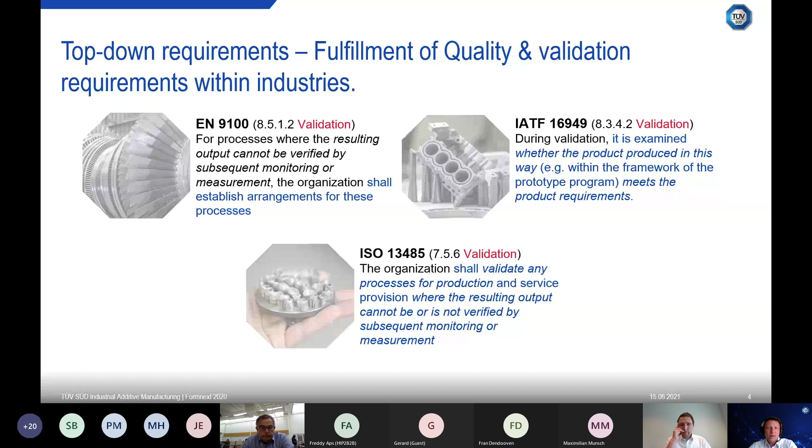The way we validate AM is on its way to being standardized. If you look at the major pain points of the technology, this leads us to the point of what needs to be standardized, and where we can really benefit to accelerate processes and minimize risks. Just to give you a few examples.

Taking the good old Ishikawa approach, which gives us this overview. So, machine: in AM it's been available for about 30 years, slightly more, and it's still considered a very innovative process in production, because the first 20 years were used for prototyping, just appearing in production usage. That means we need to assure that proof of reproducibility and proof of safety is there. So every standard which helps give proof to AM machinery, which we can test, inspect, and certify according to, accelerates the adoption of AM. It's as easy as that. The first standards, which I will explain later, are coming up here.

As well, materials—especially for powder bed fusion, where powders are handled—are highly susceptible to contamination. If you take a material into a process chamber with existing machinery, there's such a high chance of contamination by the worker or by the processes performed at the machine. This is incredibly risky, especially compared with existing milling machines, etc. So this needs to be standardized. How do we standardize material maintenance at the shop floor? It's very difficult, because the human factor is so strongly involved. So what we did was standardize the operational performance of a production site.

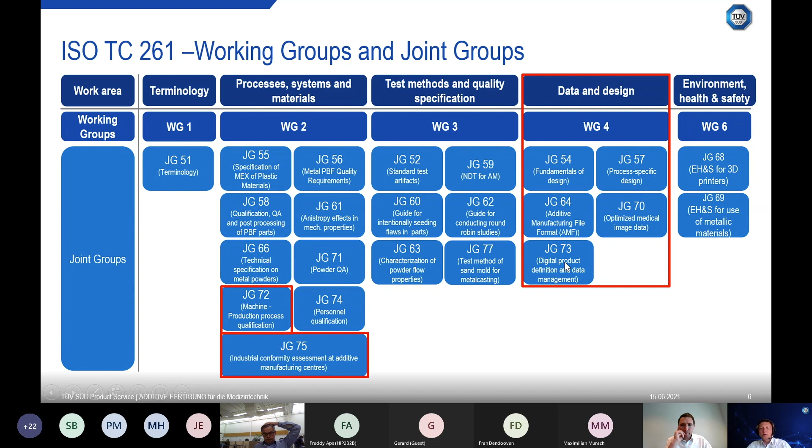In general, I believe in standardized implementation. As soon as we have standards, there is a TIC institution which can test according to that, and this accelerates things because of the clearly defined implementation requirements. The consultative approach is still very valid and very good, but if standards are strong and very credible, it becomes more sensible to just use the existing standards.

If there is no standard, of course, the consultative approach is the ideal way. The good old trial and error approach is as well valid and not wrong, but of course is the most cost sensitive one. So trial and error, and learning from old mistakes, needs to be done by each technology which does not have any reference. But for those like powder bed fusion, where we have thousands of installed systems already, the trial and error approach does not need to be made anymore.

Now have a look at our concept, how we defined standardized implementation. If we first of all look at the application-specific requirements, it's difficult to really take all applications and say, if you get TÜV Süd certified or certified according to industrial AM production site, you will be able to work reproducibly for all applications.

Of course, this is not possible. But what is possible is that we use the typical AM pain points and pitfalls and standardize those that de facto humans are working to avoid. And this is what we did. So in the standard ISO ASTM 52920, we collected together all the well-known quality assurance measures in the production side, just to avoid that trial and error is happening.

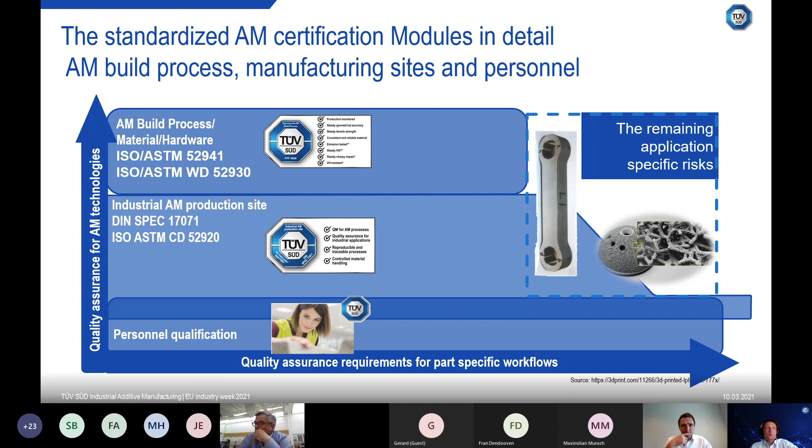We are training the quality managers how to set up a quality assured system, which fits perfectly and is aligned perfectly with general quality management systems like 9001. And we developed a scheme for the machinery to combine the materials and processes on the hardware, to test them according to reproducible output.

Here's a small overview about AM-specific risks from the machinery point of view. This is something that needs to be done for highly critical components. So if you have a highly critical component which is implanted in a human and has the chance to cause deaths, or is flying around and has a chance to cause damage and deaths, then we need to use a risk assessment, and this risk assessment in AM is as well on the way to be standardized.

This is the next step that I initiated at the ISO ASTM side, that we do a standardized risk mapping for highly critical components. This will help to accelerate as well the adoption within this sector, as risks are well known already for technologies like powder bed fusion. So we can standardize it.

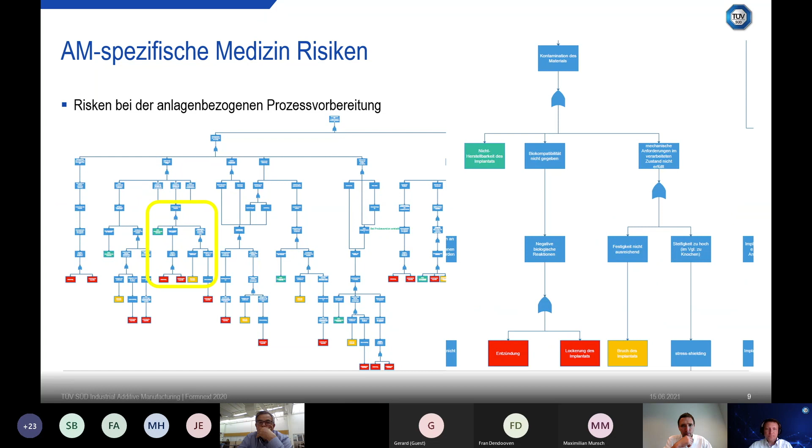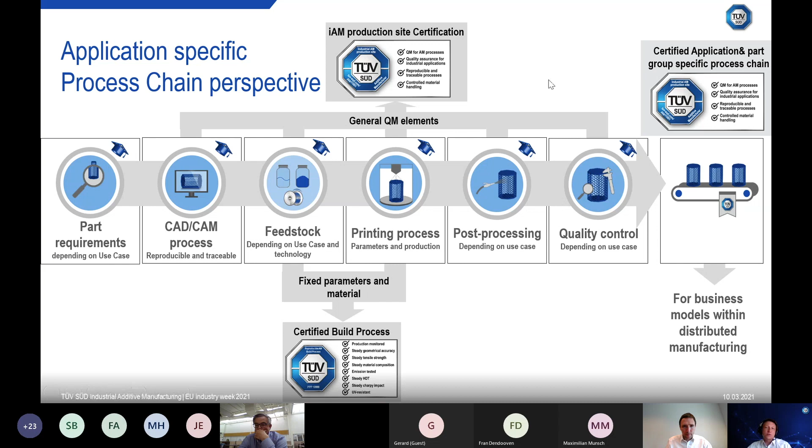Industry standards in AM in general help to decide how to minimize the efforts on validation, how to fulfill regulated industry requirements, because you can use those standards to fulfill those, and you can install them in purchase agreements. So, for example, establishing a purchasing system for AM spare parts internationally, you could, in such a purchase agreement, install standards which help you to monitor the quality.

And this is something that we can train, of course, besides the fundamentals of AM, design validation topics, materials know-how, which is very specific for material science researchers, and of course risk assessment, which I already mentioned, to give you guidance how to perform a risk mapping in AM.

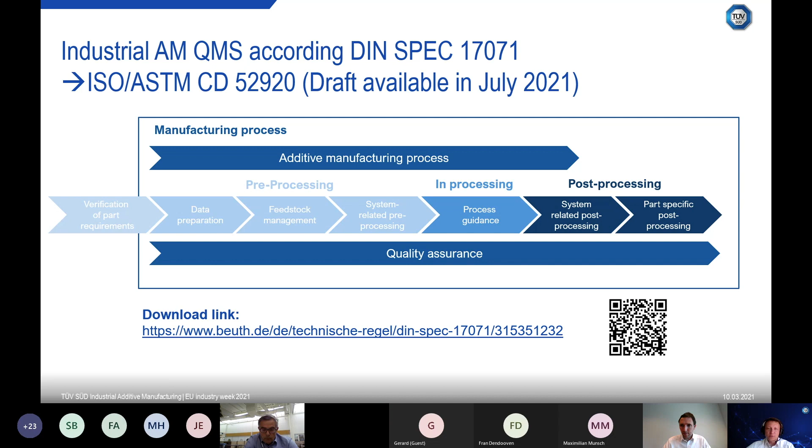And I started to write this standard already at EOS 8 years ago, and right now we are there to make it really an international standard. So very proud of that, and it was a long journey. A lot of international experts contributed to this standard from aerospace and medical industry, and we took all interests of these industries into it.

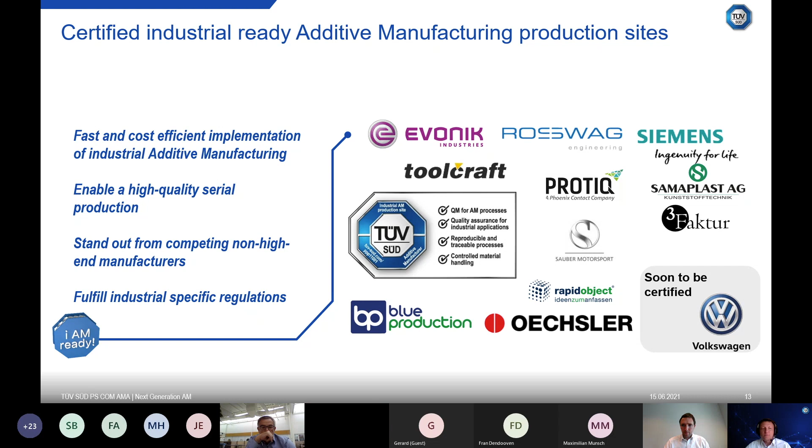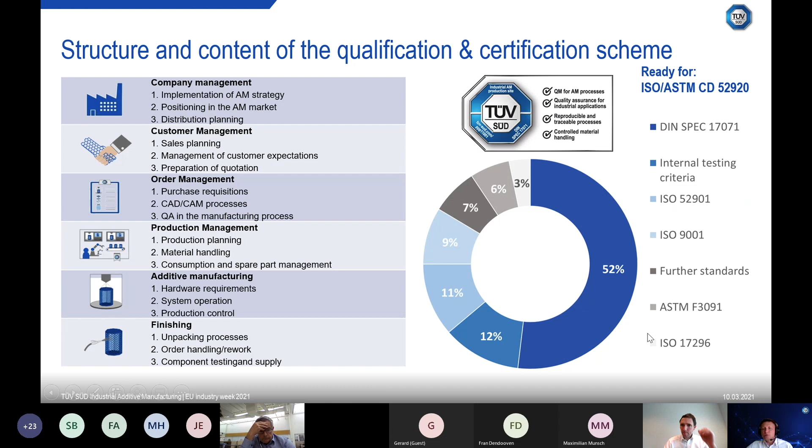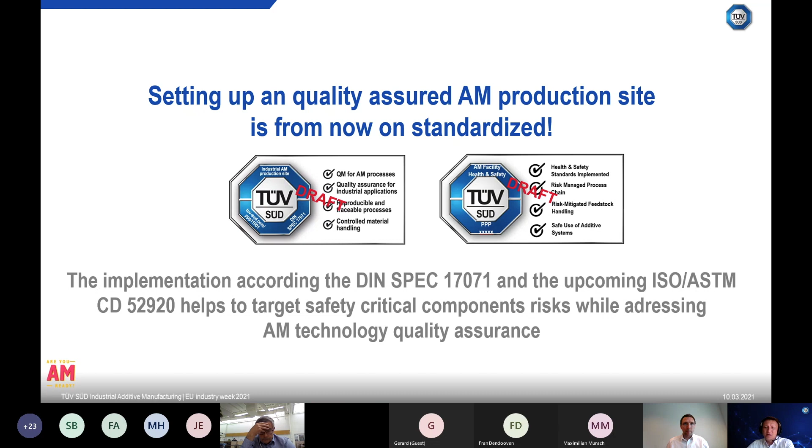An overview of the details of the certification program: the structure on the left side, the entire standards which are used in detail on the right side in the certification scheme. And this can as well be combined with health and safety audits and certifications, especially if you deal with hazardous materials.

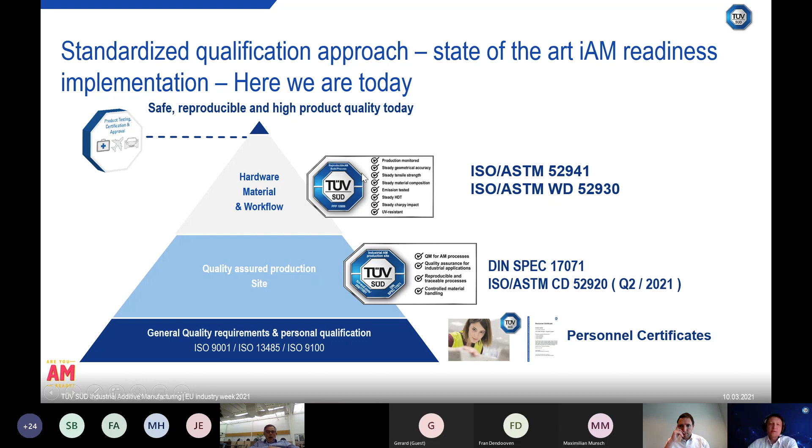It's just an overview of how it builds on top. So on the bottom line, we have personnel certificates for the staff on the shop floor. Then we have a quality assured production site, which I just explained. And then there's a build process certification. This is a very young service, which we just recently published and did here the first system certification together with

Ultimaker, a well-known desktop printer, and Ultimaker published here this Pro series of desktop printers, which they go with into production, and they are quite often installed in assembly lines, helping to deliver spare parts on demand for assembly lines.

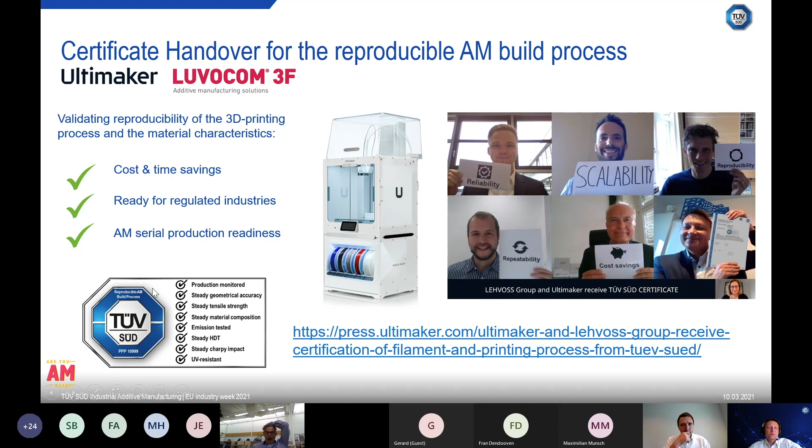Therefore, they decided to perform an installation and a reproducible AM build process certification with us, because it helps their customers to accelerate their adoption and to minimize the cost of installation, because IQ/OQ/PQ is partly already addressed within our reproducible AM build process certification.

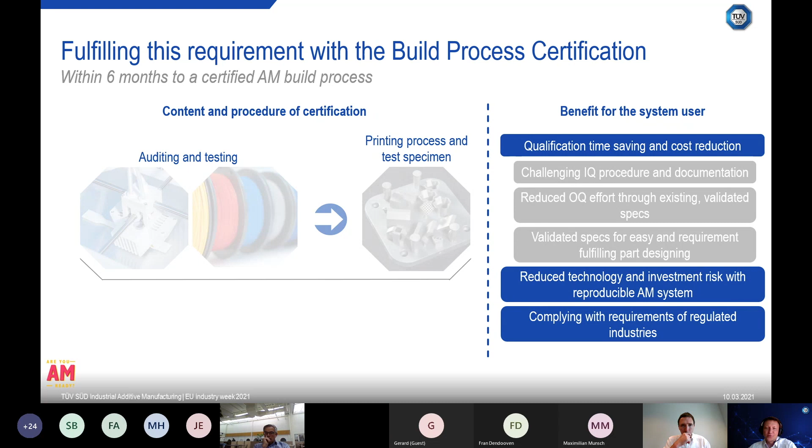For that, we are auditing and testing Ultimaker's manufacturing site, then the material manufacturing site, and of course printing parts at our facility at TÜV Süd. Ultimaker sent us 2 systems. We were printing the parts, testing those, and testing according to defined specs.

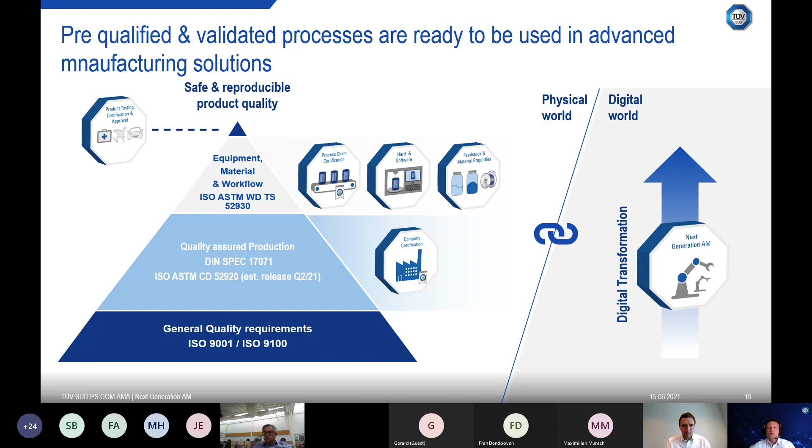All those are on the physical side, which I explained, like training, auditing on facilities, auditing on the build process. And I believe that this physical world, transparency and standardization help us to transform as well to the digital quality assurance world of AM processes.

There's a reason why. Of course, we want to utilize the full potential of AM, and this is a distributed supply chain network. So we all know that there's one major business driver in AM, which is distributed manufacturing, and this is enabled only if we can assure reproducible AM processes. So this works via TIC, testing, inspection, and certification, and standardization.

Then we need to install our printers globally, which are partly already installed. Certify them, test them, and establish a distributed supply chain network. As well, it fulfills, by the way, quite often sustainability demands of the future, as sustainability is as well taking care about CO2 emissions, about

sustainable development goals, SDGs, as well as the Lieferkettengesetz or other regulative requirements which are coming within the next few years. So companies need to find answers how to fulfill sustainability. And additive is one of these answers, so we can shortcut the global supply chain and use AM locally. As well, we can outsource production quite spontaneously if defined with quality assurance measures.

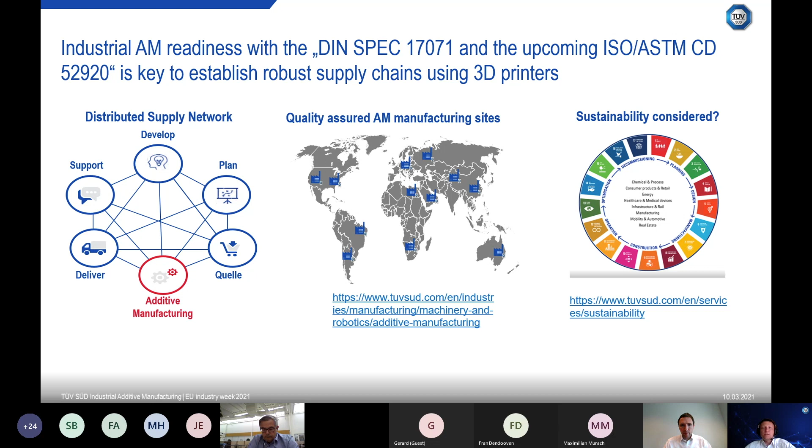As well, we can use material and reuse material within the printing process after recycling it. And we see all this happening in the industry. You met already a couple of startups which are really working on recycling of materials for AM machines, as well as distributed manufacturing platforms which are helping to organize that. As well, we see the regulative side. So it's a wonderful movement, and AM is for sure part of that.

What can a TIC player like TÜV Süd do? Of course, we can certify digitally somehow, if possible. I see this happening, but it's a journey for the next 10 years for sure, as the process is still highly man-made. So the human factor is making the decisions in the process, and to certify that just based on data is for now not possible.

So we can only certify parts of it, maybe as a next step the build process on the printer, if enough sensors are installed and we have the mechanism to analyze the data from the sensors. Here, by the way, we are working in several funded projects with the industry to try the first pilots out for such a scenario.

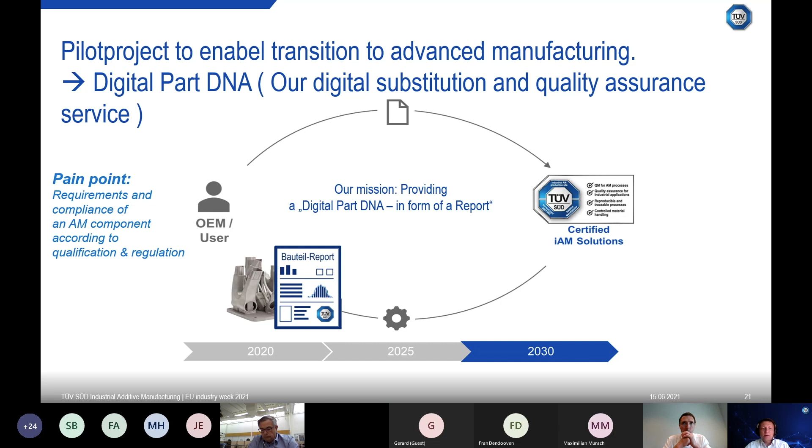So we are collecting data from the production side and installing sensors in the machines to understand how to validate or qualify an AM build process based on the sensor data. So the first setups are already made and the first data are collected, and here we are defining the first kind of quality gates.

But I see as well that the part itself, which is produced, is not just the build process, but as well the entire production process. And it's just one piece to qualify the build process. We need to as well take care about the pre-process and post-processes. So such a part DNA for the parts can be issued by TÜV Süd as soon as there is a defined specification for those parts. And this is something we are working on with pilot customers from several industries.

Summarizing, there is a physical world certification business which we are already able to perform today. So enable your employees, the quality managers, the engineers for quality assured thinking in AM production. Then get an audit or a certification for your production site, establish or ask your machine vendors to get a reproducible build process certification because it minimizes your time and costs during the installation and validation.

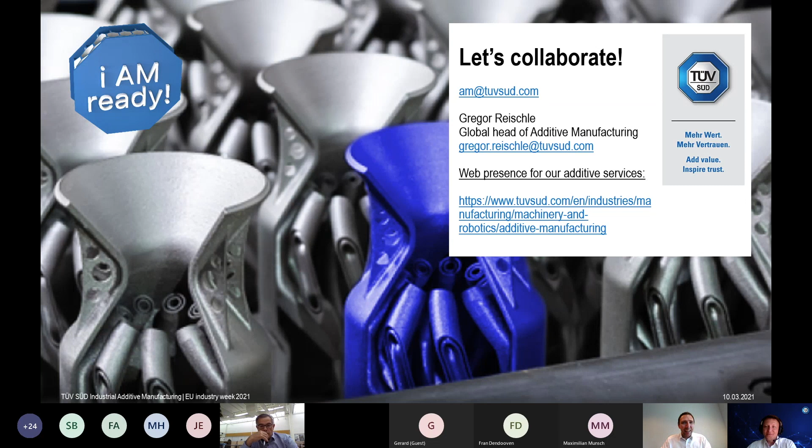Thanks a lot. It's very interesting. At the same time, it does remain quite complex. In my impression, it's always a bit a matter of we, with the AM industry, need to play along with the rules of the regulated industries, let's say. And we're not there yet, and we don't perhaps always realize how important it is that we actually do follow those standards and rules. So I think you made it quite clear that it's complex and needed for our industry, in fact.

Now, as for the questions, a first one that came in: could you elaborate on what is in the pipeline on material characterization, especially for filaments? Mm-hmm. So we can always test according to a defined spec. So a material filament needs to deliver regulated industry demands in terms of properties, features, minimum quality output. This is something we can always deliver as a third party. So it's a role of a third party.

So if you see that your industry partners want to have a claim for a certain material property, we can always deliver that without any standard because it's testing according to a defined specification. So this is what TÜV Süd does on a regular basis in all industries. A specific standard for AM filament materials, for now, I am not aware of. So we don't expect one very soon. There are design guidelines for filaments, of course. For the materials, I'm not sure. I am happy to dig into it and give you the answer at a later stage.